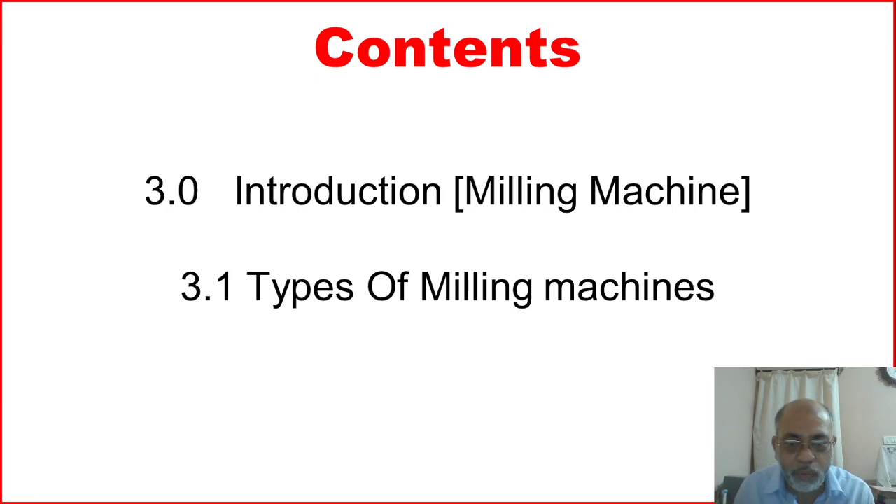Today we will be discussing the milling machine, which is in Unit 3. First we will go for the introduction, then we will go for the types of milling machines. So what is a milling machine? The milling machine is a machine tool that removes metal as the work is fed against a rotating multi-point cutter. This multi-point cutter is made out of a metal known as HSS, that is high speed steel.

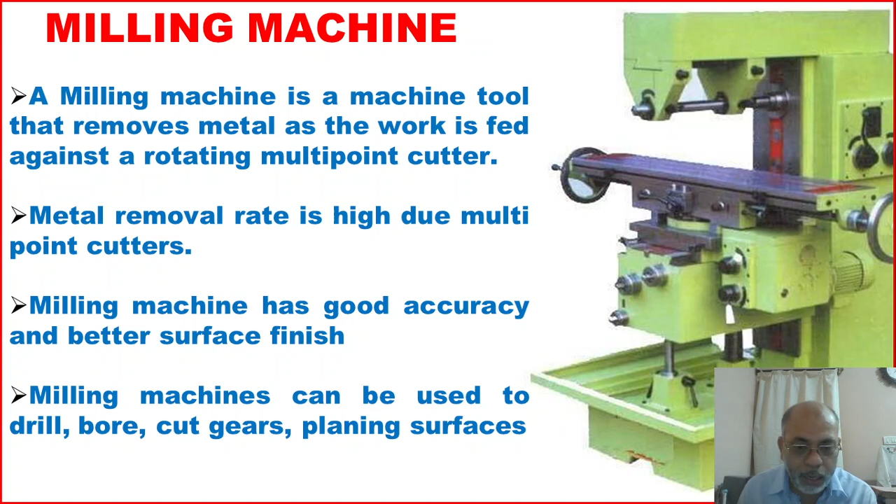Metal removal rate is high in this due to the multi-point cutters. We have got a number of cutters, single point and multi-point cutters. In a milling machine we have got a multi-point cutter, so that's why the metal removal rate is very fast. The milling machine has good accuracy and a better surface finish because of the multiple cutting edges. Milling machines can be used to drill, bore, cut gears and do planing of surfaces.

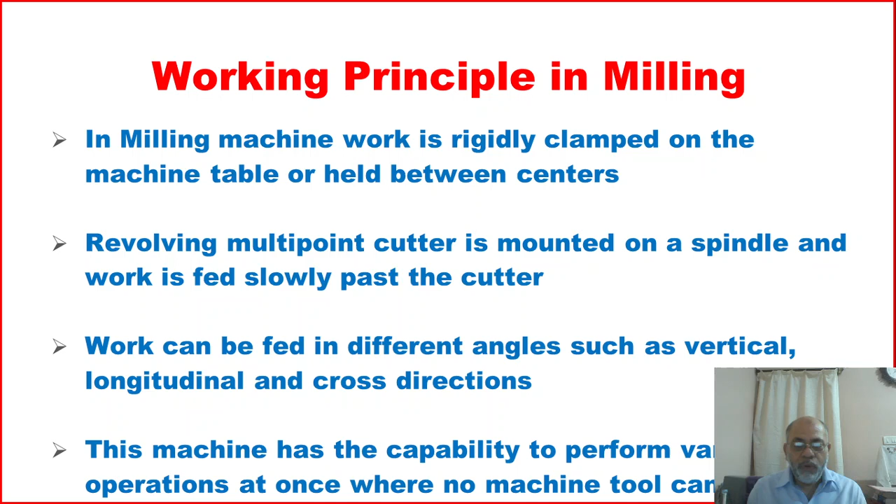Now, the working principle of the milling machine. The work is rigidly clamped on the machine table or held between centers. To do any work on a milling machine, we have to clamp the work firmly and rigidly in a vise or in a fixture, or else it can be held between two centers, then we can do the milling operation. The revolving multi-point cutter is mounted on a spindle and the work is fed slowly past the cutter. Work can be fed in different directions such as vertical, longitudinal and cross directions. The machine has the capability to perform various operations at once, which no other machine tool can perform.

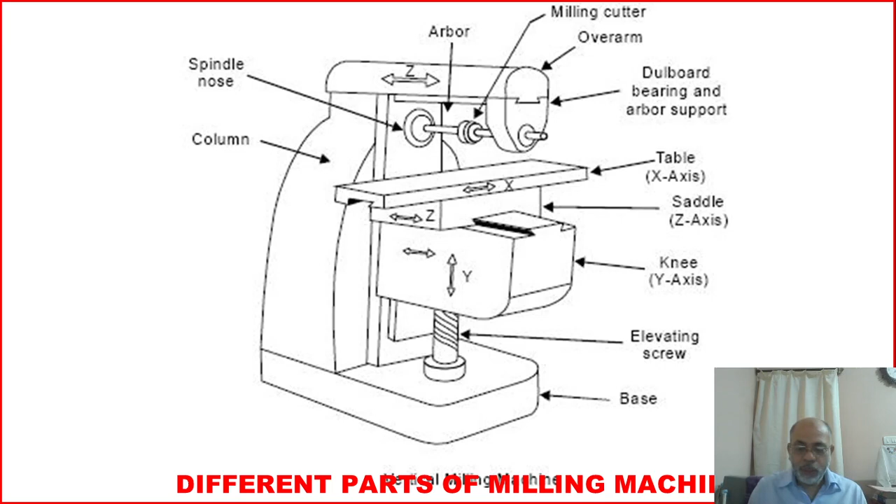What are the different types of milling machines? The first one is the column and knee type milling machine. Then we have the manufacturing or fixed bed type milling machine. Then the special type milling machine. Then the planer type milling machine.

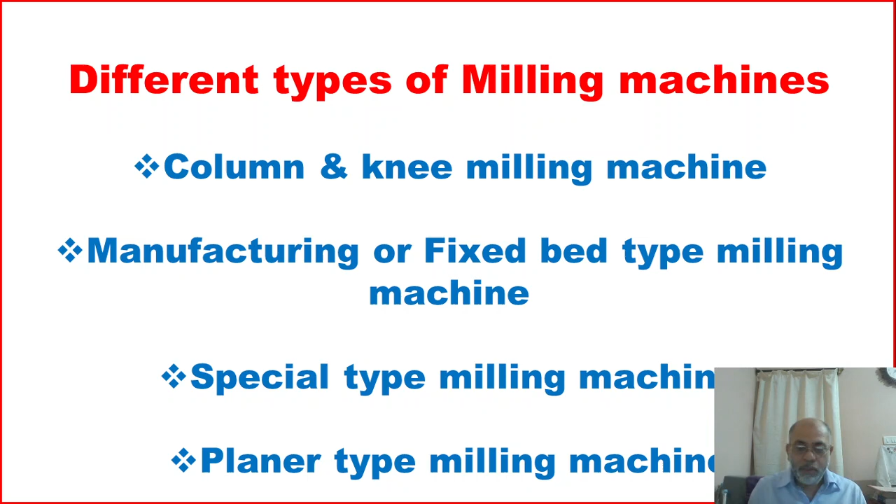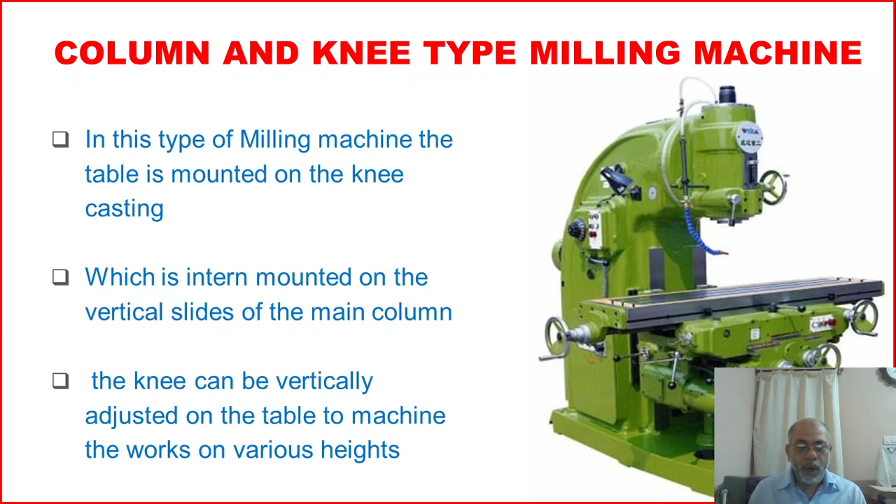The first one is the column and knee type milling machine. In this type, the table is mounted on the knee casting, which in turn is mounted on the vertical slides of the main column. The knee can be vertically adjusted to machine works of various heights. Under the column and knee type milling machine we have different types: the hand milling machine, then the plain milling machine.

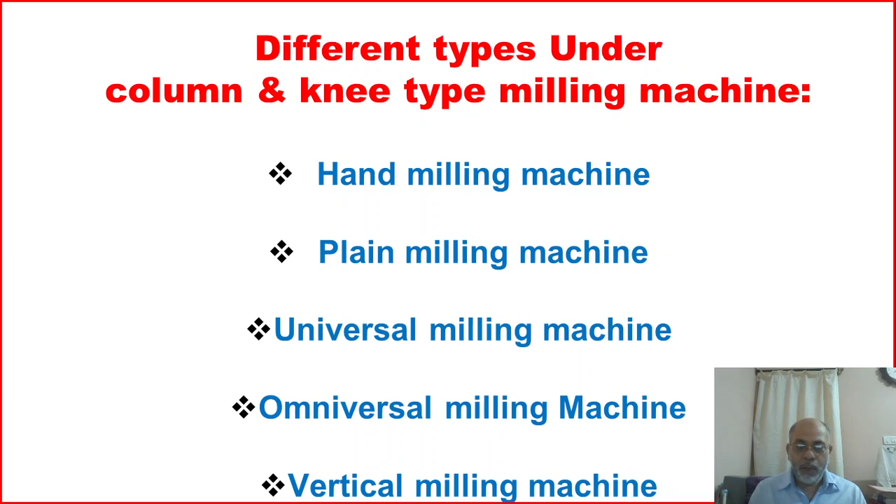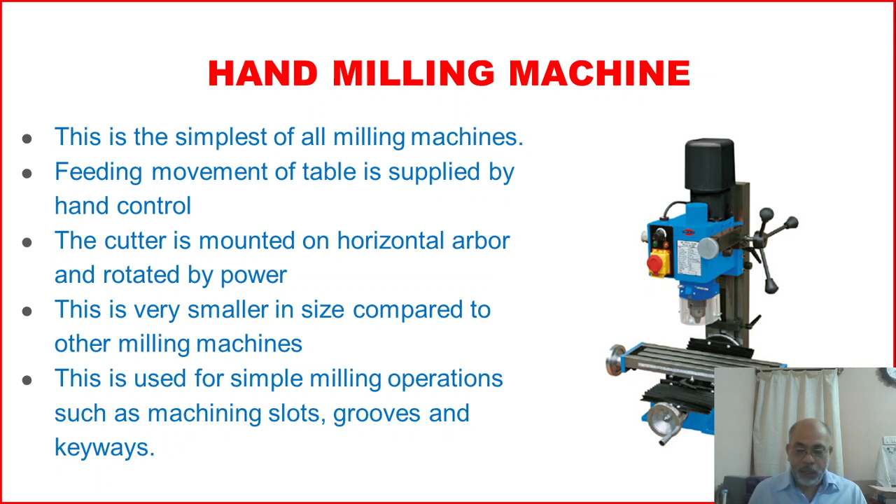Then we have got plain milling machine. This type of milling machine is more rigid than hand milling machine. This is much heavier than hand milling machine. The process of milling flat surfaces with the axis of cutting tool parallel to the surface. In this, the rotating milling cutter does not give a continuous cut but moves from one end of the workpiece to another end. These are the different parts of the plain milling machine.

We have got the base, the elevating screw, then the knee, the saddle, the workpiece, the cutter, the spindle, the arbor, overarm as well as the column.

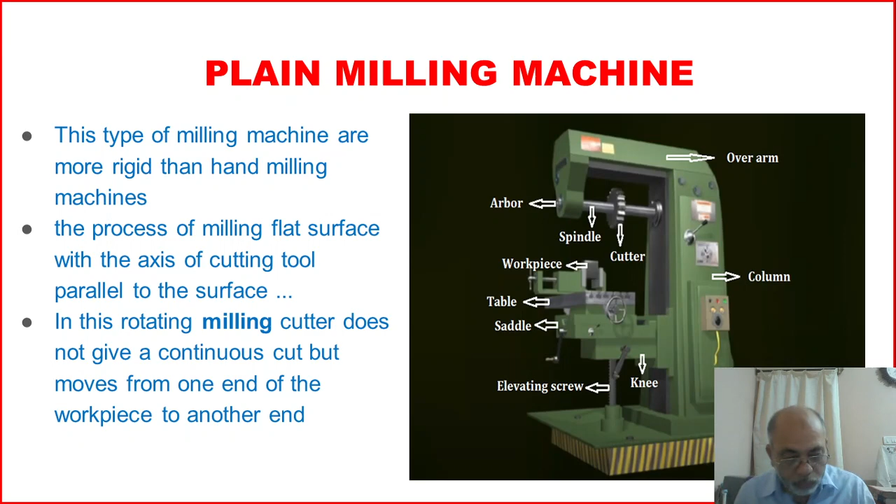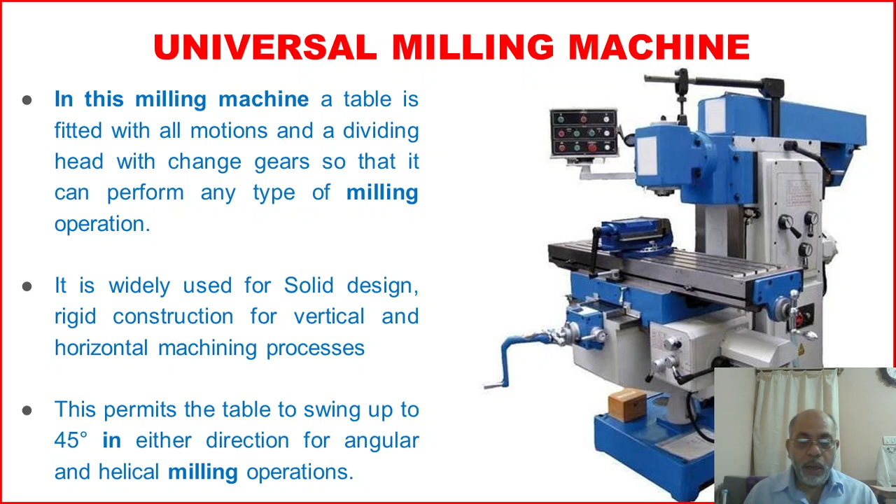Next we will go for universal milling machine. In this milling machine, a table is fitted with all motions and a dividing head with change gear so that it can perform any type of milling operation. It is widely used for solid design, rigid construction, for vertical and horizontal machining process. This permits the table to swing up to 45 degrees in either direction for angular and helical milling operation. In this machine, we can cut gears also.

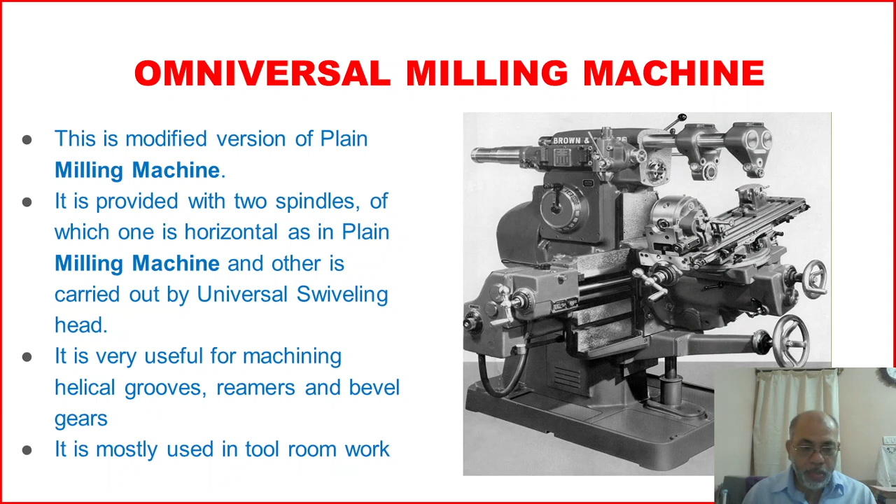Then we have got omniversal milling machine. This is a modified version of plain milling machine. It is provided with two spindles, of which one is horizontal as in plain milling machine and the other is carried by universal swivel head. It is very useful for machining helical grooves, reamers and bevel gears. It is mostly used in tool room work.

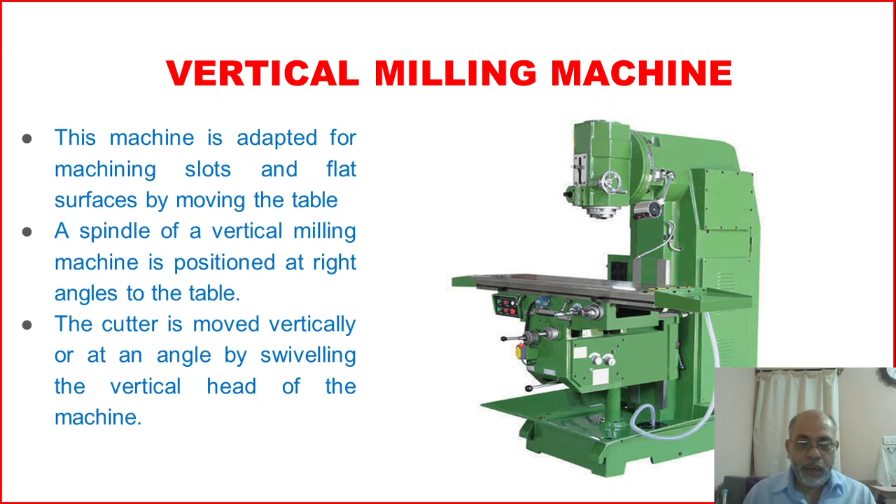Then we have got vertical milling machine. This machine is adapted for machining slots and flat surfaces by moving the table. The spindle of a vertical milling machine is positioned at right angles to the table. The cutter is moved vertically or at an angle by swiveling the vertical head of the machine.

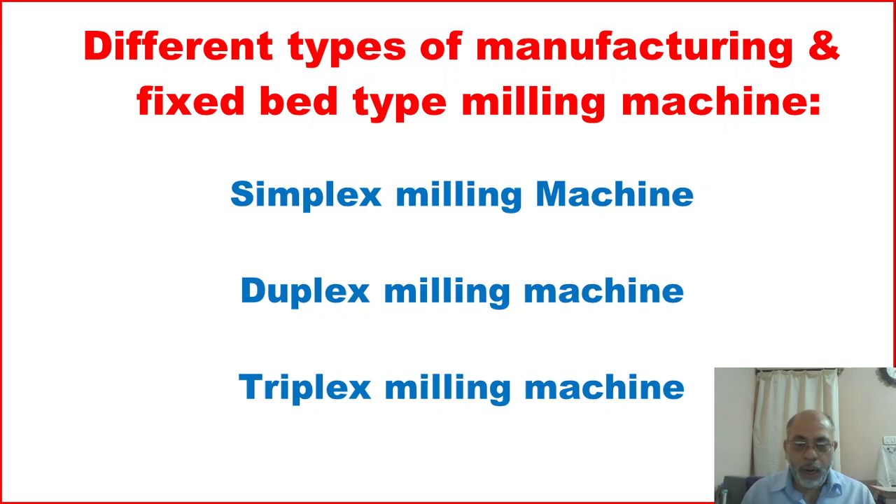Then we have got different types of manufacturing and fixed bed type milling machine. In this we have got simplex milling machine, duplex milling machine and triplex milling machine. What is this simplex milling machine? These fixed bed machines are larger and rigid. It has got a huge bed, so that's why huge work can be mounted on it. They differ radically from column and knee type. The name simplex indicates that the machine is provided with single spindle head.

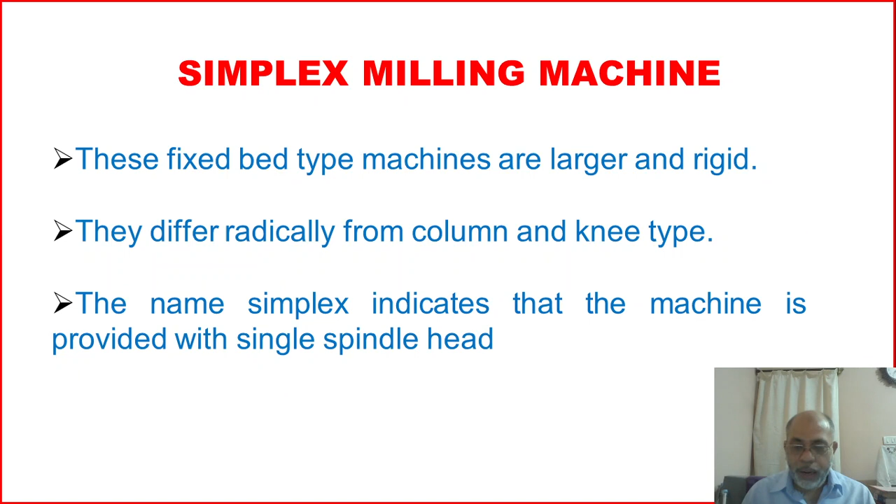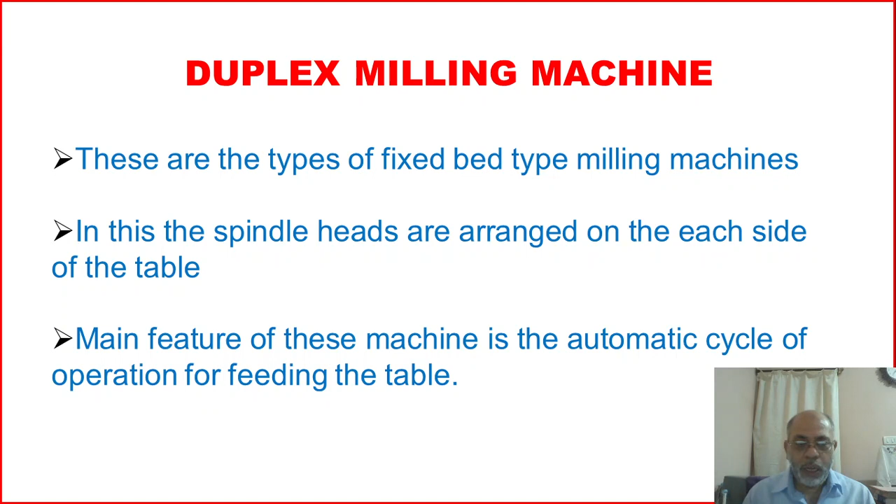Then we have got duplex milling machine. These are the types of fixed bed milling machine. In this, the spindle heads are arranged on each side of the table. The main feature of this machine is the automatic cycle of operation for feeding the table.

Then we have got triplex. We have got three types, that is simplex, duplex and triplex. Triplex are also fixed bed type machines which are very large and rigid. They differ radically from column and knee type milling machine. The name triplex indicates that the machine is provided with triple spindle heads. Simplex means 1, duplex means 2, triplex means 3.

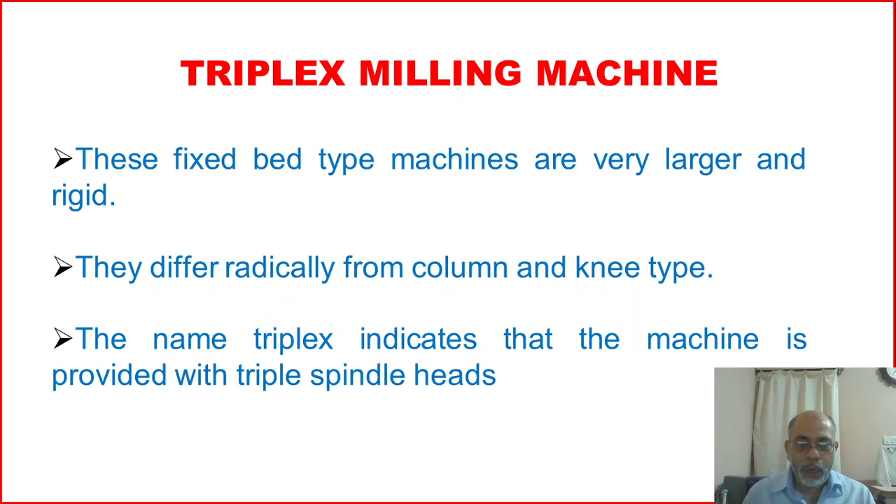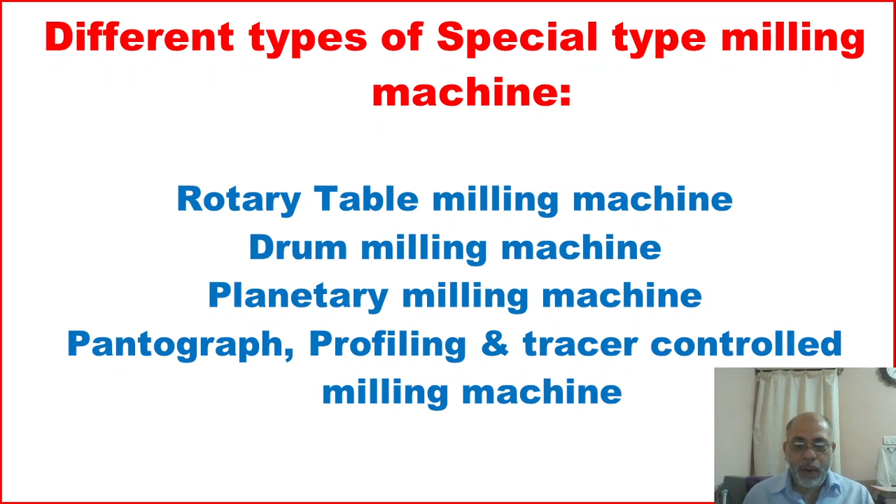Then what are the different types of special type milling machine? In this we have got rotary table milling machine, drum milling machine, planetary milling machine, pantograph milling machine, profiling and tracer controlled milling machine. Now we will come to some of the MCQs.

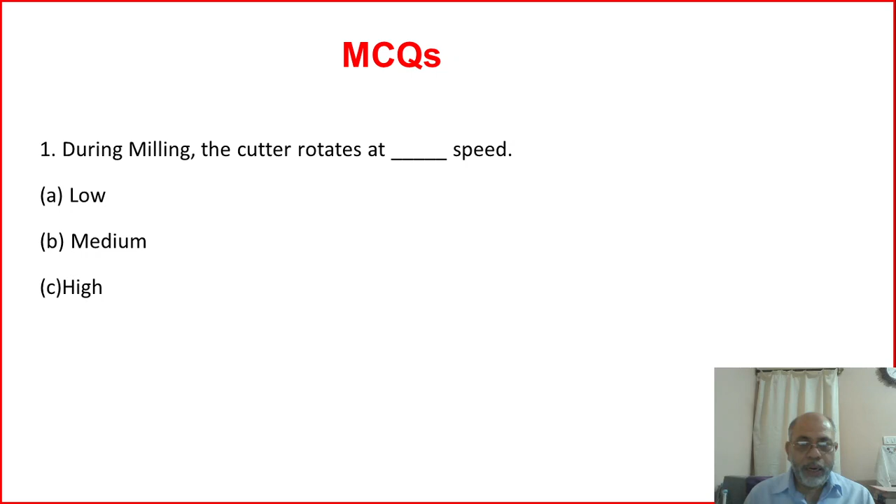So the first one is, during milling the cutter rotates at dash speed. The options are low, medium, high. Then second one, the first milling machine was of dash origin. The options are French, English, German. Third one, in milling machine the work is fed against a rotating dash cutter. Options are single point, two point, multi-point.

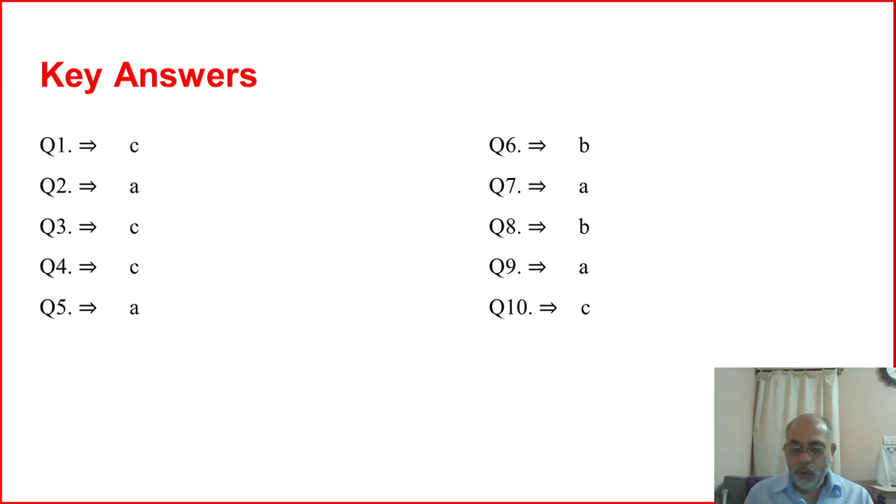Last one, the dash machine produces complex shapes of dies, molds, etc. Drum milling machine, profile milling machine, tracer controlled milling machine. The key answers are here where you can go through and find the answers. Now here are some of the reference books which we have quoted.